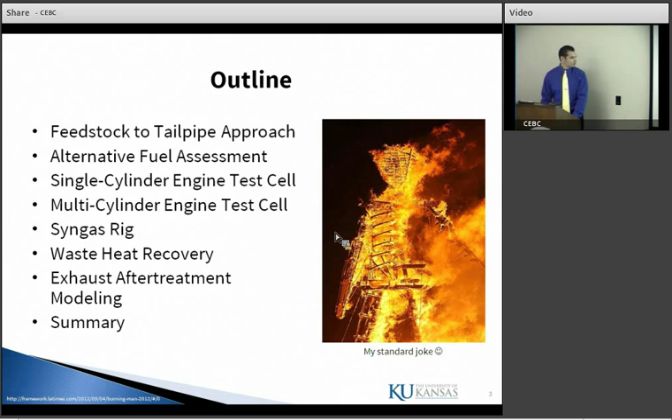The KU feedstock to tailpipe approach is really wholly unique to universities in that we look at the entire system of biofuels, from ecosystem level processes - dealing with ecology, evolutionary biology, and geography - to biomass production, again biology, environmental and chemical engineering. We look at how these fuels impact the land, how we produce these fuels through the production methodology, with some nice green algae growth, biomass pre-processing, and chemical transformation - how do we take these raw feedstocks and convert them to a biofuel?

Then alternative fuel assessment, which is my area, where we look at how these fuels perform in an engine, which is critically important. You can see the circular nature of this: you've got to grow the fuel, you need to see how the fuel impacts the land environment as you're growing it, then you need to convert it to a fuel, and then you need to burn the fuel. But when you burn the fuel, you have CO2 emissions, which end up impacting the ecosystem level process again. So it's really a wholly unique infrastructure in terms of analysis.

That's critically important because a lot of times when you do the analysis, you're looking at a specific portion and keep your blinders on with respect to what's downstream and upstream. When I was at the University of Michigan, if we got a biofuel in the engine laboratory, we didn't care where it came from. We just saw how it performed in the engine. Did it perform well or poorly? If it performed well, we said that was a great fuel. But what if it took a lot of land or energy to produce? What if it was hard from a catalytic standpoint, using a lot of catalytic material? Then maybe it's not the best fuel. So it's important that you understand the entire methodology.

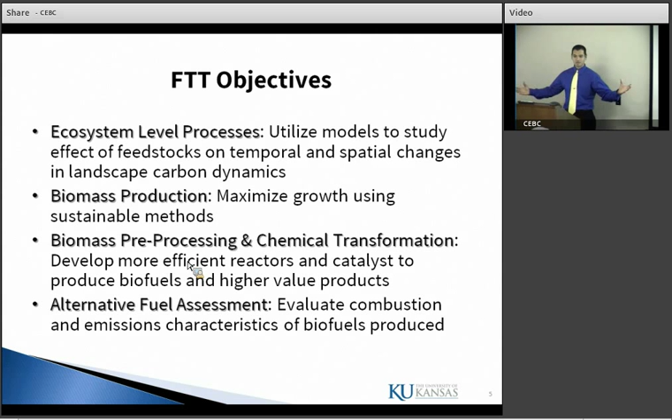If they don't work, then you hear a lot of bad things about them and people are reticent to use them. So if we look at the issues that biofuels have that we need to consider, well, obviously price is up there. Safety, how safe are they? I think someone said that if you were to develop gasoline today, the EPA and OSHA would never allow it because of how dangerous it is. Think how dangerous gasoline is. You pour a little on the ground, you can light it, bad things happen, right?

Reliability, it's got to work every time. Performance and emissions, how well does it perform in the engine?

Now you have to look at the life cycle production of these biofuels, the renewable fuel standard. The second one that came out looks at the whole picture involving these fuels. Energy content, material compatibility—not a lot of times is that thought of in engines. If it eats through your seals and your O-rings, then all of a sudden you've got issues. So engine companies have got to think about those compatibility issues.

And then also infrastructure. For example, I believe for jet fuel, they only allow 5 parts per million of biodiesel in the jet fuel lines, because the aircraft industry is really reticent to what biofuels will do in jet fuel. A good example of that: look at the fuel freezing quality. We've got jet aviation, we've got 100% biojet that might be upgraded through a Fischer-Tropsch process, and then biodiesel at minus 30 Celsius is basically solid. Do you really want that in your airplane?

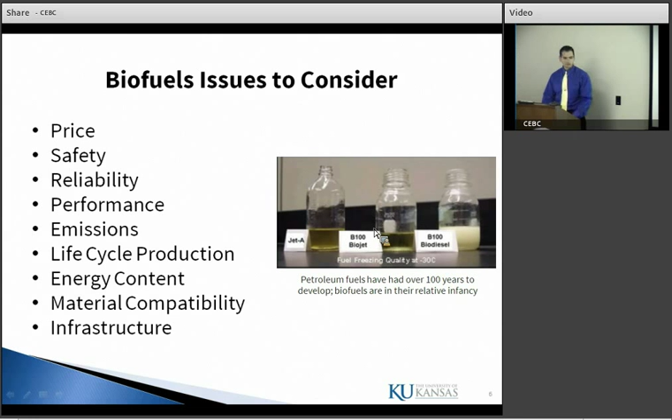So what I do, what my students do, when we look at developing the right biofuels, this does require engine testing. It cannot be done in a vacuum without engine testing. The physical fuel properties influence engine performance and emissions. Perfect example of that: here we have the same engine—here's jet fuel, JP8, here's ultra-low sulfur diesel, and here's biodiesel. We did not change injection timing at all between those fuels.

This is pressure as a function of crank angle, so it's telling us in-cylinder when each fuel is combusting. We didn't change anything, we just put the different fuels in. As you can see, that makes a huge difference with respect to these different fuels when combustion is occurring. That impacts fuel economy, nitrogen oxide emissions, particulate matter emissions, everything happening in the engine.

What does the customer want? The customer wants a fuel that drops in and works perfectly, right? It's not going to change their fuel economy, not going to change their emissions. They may not notice that, but the EPA will notice that.

But this is not what you see when you create a new fuel. They will always have different characteristics, because they're not petroleum ultra-low sulfur diesel. So the physical fuel properties do definitely influence engine performance and emissions.

So you have designer singular fuels or blends for the right characteristics. You've got to look at these fuels and say, can we blend them right? Can we take biodiesel and JP8 and make it a ULSD? You could do that. You can imagine if you just average those, it would be right in the middle. It doesn't exactly work that way, but that's part of the analysis that we try and do.

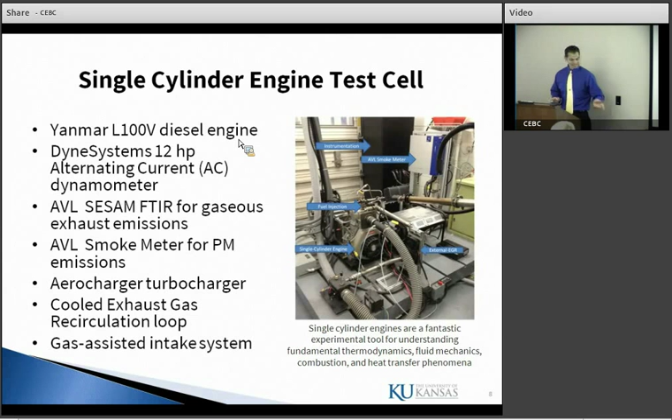This is great for fundamental studies, allowing you to design better fuel characteristics. Some of that information will translate over, but we do need a multi-cylinder engine test cell, and we do have one. You'll see that in a minute.

Another thing wholly unique to our engine is that it came with an older style injection system. That may not mean much to you, but it means a lot to me. We need it to reproduce as much as possible a production engine, so we tore off the injection system and added a high-pressure rail injection system, with a Bosch ECU and a fuel pump you'd find in the 2013 Jetta.

Same type of system. We actually have a Fiat Punto injector from Italy that happened to be just the right size to fit our engine. One of the most serendipitous, lucky things we've ever found.

But it allows us to dynamically control fuel injection to the point where we can inject up to 5 times per one thermodynamic cycle. So we can have 5 different injection events for one thermodynamic cycle. Think about how much time you have for one combustion cycle, and now imagine injecting 5 different amounts of fuel within it.

So we dynamically control fuel quantity and fuel rail pressure, 40 to 200 megapascals. This is where the industry is going - finer and finer atomization through higher fuel pressures. And we can do this to 0.02 crank angle resolution.

Why is that critically important? Let me go back to the previous slide. What do we want to do with these fuels? If we do testing and leave injection timing where it is, we're missing some of the fuel's properties and how they impact combustion, because it's not normalized - combustion isn't happening at the same time. So you have higher temperatures, different pressures, and you can't see exactly what's happening.

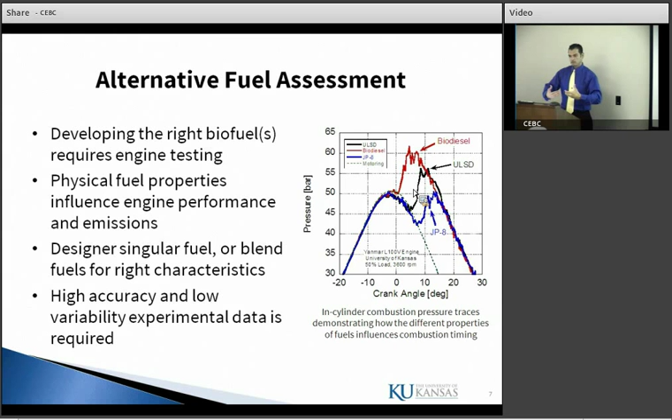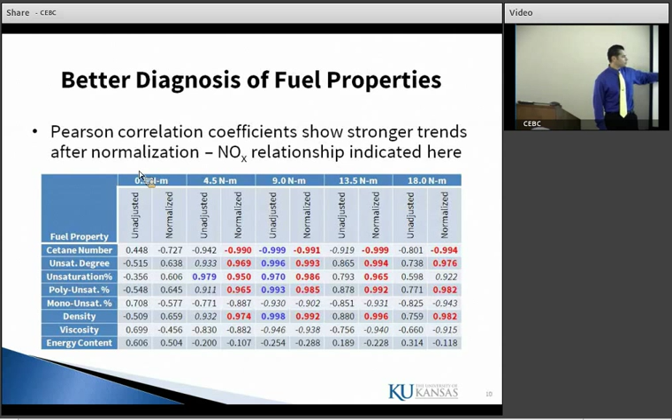Same thing with the degree of unsaturation, and the same with unsaturation percentage of polyunsaturation. By adjusting the injection timing so we normalize these fuels from a combustion standpoint, we get a really good understanding of how the properties are actually impacting things like NOx.

What does that mean to us? That means I can go to my colleagues in chemical engineering and say, you want a little bit more of this or a little less of this, because then we can start tailoring the fuels to have less NOx production, carbon monoxide, better fuel economy. You name it, we can design a fuel that works better.

How would that happen without an engine test cell, and without the proper characterization and normalization? You wouldn't be able to have that.

You would just guess and say, this looks good, maybe it's easy to produce, maybe it's cheap, great. But if it doesn't perform well, then that doesn't work well in the overall industry. So that's an upgrade that is critical.

You can see in some of these where we didn't have a strong correlation before, we had a weak correlation, now it becomes strong. Now we can say for certainty, this is what happens.

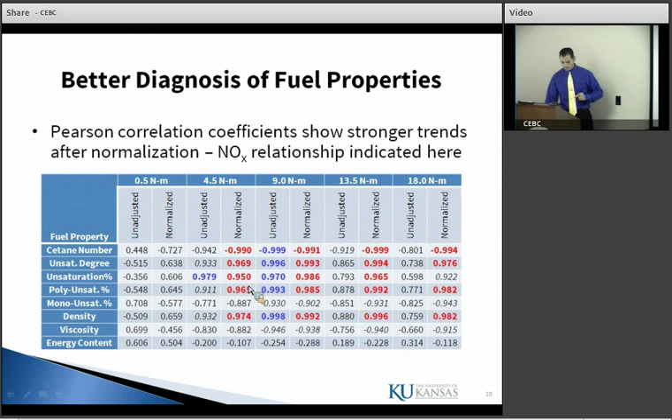This is an example illustration. This is the paper that we created for Energy and Fuels before we upgraded the injection system.

Now we're doing a follow-up paper where we can look at these characteristics such as the hydrogen-carbon molar ratio and how that impacts things like NO, NO2, total hydrocarbons, particulate matter, brake-specific fuel consumption, which is fuel consumption.

We can create a table so that we can go back and say, maybe you need a little bit less viscosity, maybe you need a little more viscosity, depending on what you want to do. For some of these relationships that we weren't able to determine before, we can start figuring out those relationships so that we can develop these better fuels.

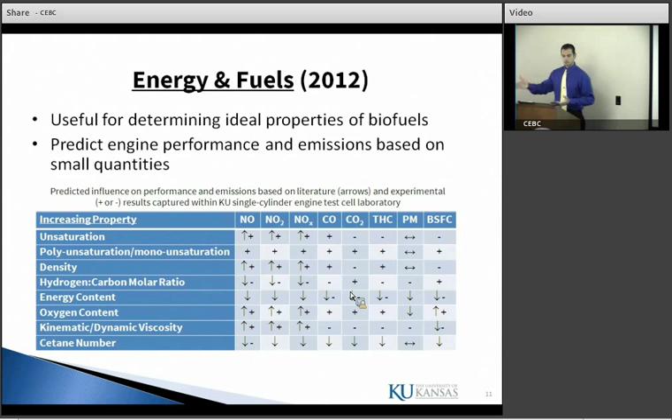That's what the single-cylinder engine is great for. Really fundamental - what is happening, how is that a function of the fuel properties?

This also allows us to test things beyond biodiesel. You've got an interesting fuel, you've got an interesting concept, you want to do it maybe for the military. The military is jumping beyond your first generation biodiesel, diesel, to the next generation diesel.

The reason they want to do that is because they want something that's just drop-in, that works perfectly. They don't have to worry about the fuel gelling, they don't have to worry about any degradation in storage.

Another thing is the military likes the single fuel forward policy, which means that they want to simplify the logistics in moving fuels. You've got gasoline vehicles, you've got diesel vehicles, and you've got jet airplanes. You've got to transport 3 fuels, right?

Imagine each fuel costing $500 a gallon. It's not like they're growing it in Afghanistan - they've got to transport it in themselves. So they've moved to a single fuel forward policy, which is pretty much JP8.

They also want to drop in fuel. They want to go straight to green diesel. So what this allows us to do with our engine test cell is actually test green diesel.

Here you see ULSD with the JP8, the conventional petroleum JP8, and we were able to get Syntroleum R8, renewable jet fuel 8, and we were able to show its different characteristics.

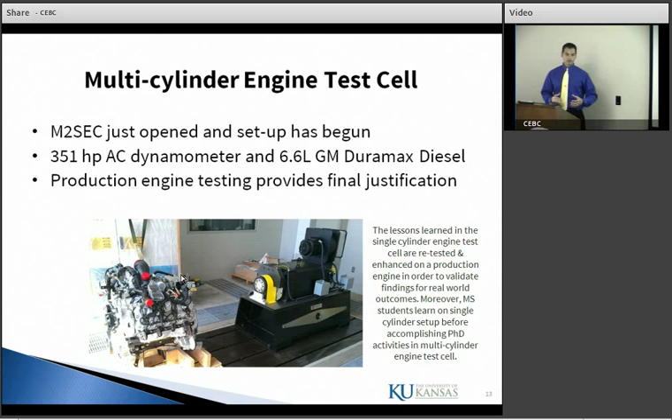So you have to think about training students along the same time. This isn't a small reactor. This is something burning under a lot of pressure, with a lot of heat, and a lot of power. They've got to be trained well. So I have 2 PhD students right now that are working on getting this going.

Finding funding for it is always a challenge. It's the chicken and the egg, right? You need to have the engine to get funding, but you need the funding to build up the engine test cell. So we're working on that.

So that is where we're going with engine testing. Our single-cylinder engine is going to just keep chugging along for forever. We're happy to throw any fuels in there that you want. We've put in jet fuels, we've put in something else—you name it, we've probably put it in there. If you want to try some ethanol-assisted diesel, biodiesel, jet fuel, great, we're all game for that. We love burning things in our single-cylinder.

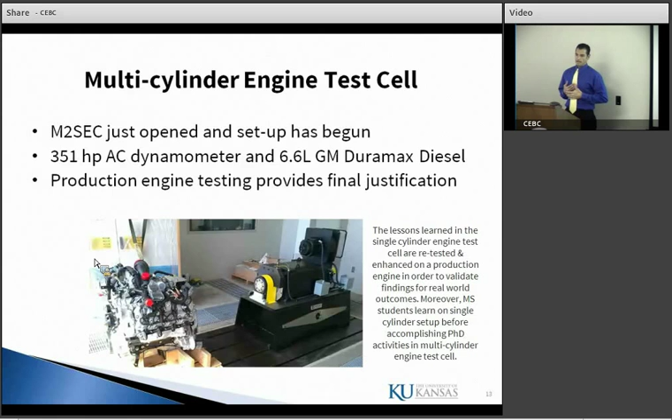But another thing that's critically important when you look at biofuels is the byproducts. There's a lot you can do with the different byproducts, but because of my background, I like to burn things. So when I look at the byproduct for things like biodiesel, I look at glycerin. One gallon of biodiesel creates about 1 pound of glycerin. If you look at the economics of biodiesel production, it's really tied to glycerin. At times, you've seen glycerin as low as about 5 cents per pound. If you take into account the density and the energy basis, this is about $1.11 per gallon for glycerin.

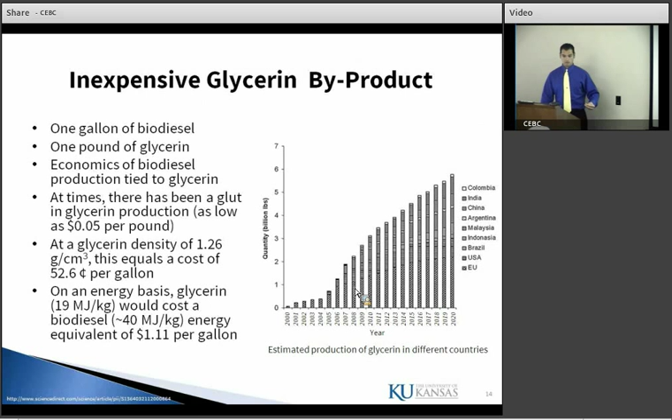Glycerin's great. Glycerin's got a lot of hydrogen. It's a great hydrogen carrier, right? What could you do with that hydrogen? There's a lot of higher value products that you can get. Pure glycerin is great from a selling standpoint, food standpoint, but if I've got a hydrogen-rich fuel, and if we look at the amount of this hydrogen-rich fuel, and it's going to keep increasing as a renewable fuel standard sees more diesel on the market, I want to do something with that from an energy standpoint, especially when I start looking at $1.11 per gallon.

So what could you do, could you use it directly as a fuel? Well, it's subject to caking or settling and solidifying the fuel lines. So no. Could you use it as a fuel additive? People have done that if you look at the SAE literature. The atomization difficulties due to high viscosity result in poor emissions and low combustion efficiencies. So no, it does not work well as a fuel additive.

What could you do? You can convert it to a synthetic gas, syngas. You can look at the glycerin, you can do some partial oxidation, you can do some water gas shift reacting on it, steam reforming. You can pull off that hydrogen, you can pull off the carbon monoxide. If you can do it right, you get a lot of hydrogen and some carbon monoxide.

As an engine tester, do I care about carbon monoxide? No, it's a fuel. It's got an energy content, 10 megajoules per kilogram. You give me an engine, I can run it on carbon monoxide. It's a fuel, it can be used. And I did that, actually—I should say we did that.

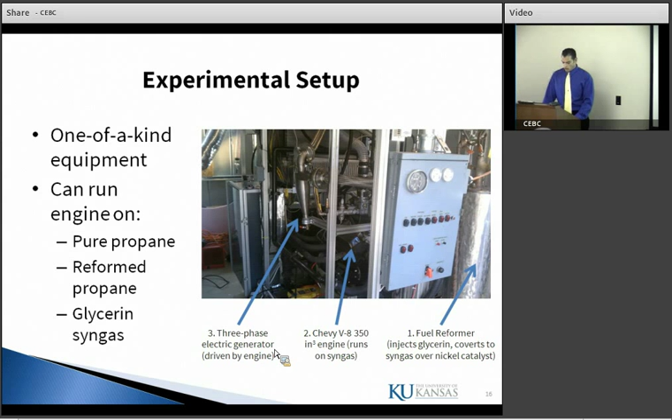Then we can take this propane, send in compressed air into our reformer. The reformer will heat up as we're basically doing rich combustion in the reformer. Our syngas comes out, it's cooled down, sent to the engine, and we can run the engine.

Once the reformer is nice and hot, then we basically put our glycerin in. We use a 20% water, 80% glycerin mixture in order to promote the water-gas shift reaction, to get more hydrogen coming out of it. It goes into our heat exchanger, which cools our syngas.

Power. All instrumented. We have in-cylinder pressure transducers. We can actually measure the entire process.

Chris, when you do this it's really very intriguing. When you do the overall energy balance, is the heat required for the reformer self-sufficient? Yes, we actually had to take out some catalytic material because it was highly exothermic. When we start putting the glycerin water mixture in and get it nice and hot, it maintains itself extremely well, to the point that we have to really watch it because otherwise it'll take off.

And so we've used glycerin conversion over nickel. We tried to do the literature research and had help from Susan Williams in this area: 7.2 weight percent over an alumina oxide support. We just bought alumina oxide beads. My graduate student in mechanical engineering actually did the weight percentage coating himself with an oven.

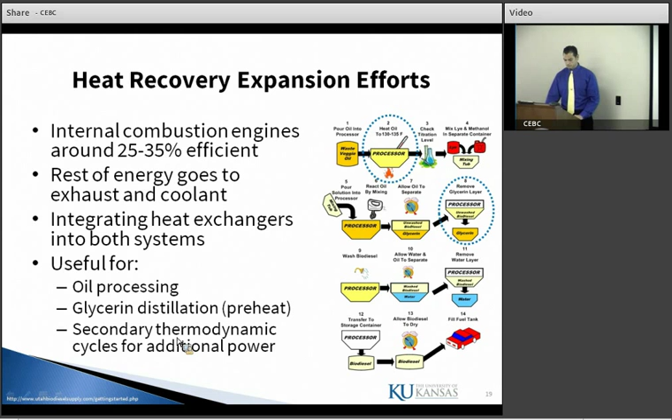This one I like: secondary thermodynamic cycles for additional power. You've got heat, you've got energy, let's convert it to electrical energy. I have a student working in this area doing his PhD looking at waste heat recovery. If you take organic Rankine cycles for exhaust energy recovery, it demonstrates potential for 10% improvement in fuel economy. 10%.

You know what the industry is trying to do each day? Get a fraction of a percent better in fuel economy. 10% - it's been used in the past. In the 70s, when we had the oil crisis, they started looking into these secondary thermodynamic cycles. It will be used in the future. The cost benefit is attractive.

You can pay for the system in a couple of years on board a vehicle. If you don't believe me, my student wrote a review paper on the subject, and I'd be happy to send it to you. It's actually the #1 most downloaded mechanical engineering article in 2013 from Elsevier - that shows you this is really where the industry is going.

We're implementing this in a single-cylinder laboratory as a precursor to multi-cylinder efforts, and we have a novel idea here. The novel idea is, for direct injection engines, they produce a lot of particulate matter.

Particulate matter is captured in a filter in the exhaust in your new diesel engines today - a diesel particulate filter. You've got to regenerate that after a while, because you know your vacuum cleaner, right? It's basically a particulate filter. What do you have to do every once in a while with your vacuum cleaner? Empty it, right? Clean it out. Unless you have a Dyson, but we don't have Dysons in our exhaust.

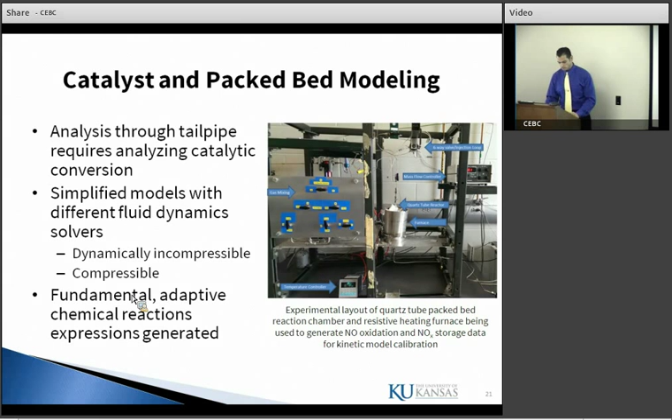The idea is to look at, through the tailpipe, how these conversions change as a function of different NOx emission levels coming out. I have a compressible 1+1D model of flow through a diesel particulate filter. We're basically creating a new model to incorporate waste heat recovery along with that, so we can see how the flow in the chambers and the heat transfer to the working fluid can be modeled, so we can do more predictive studies that tell us what tests to do in the future.

We're looking long-term to go to engine control unit type of systems. Imagine if you got a more efficient catalyst and a more efficient combined diesel particulate filter heat exchanger, and an engine control unit with simplified models in there that can help control engine operation to get better fuel economy and lower emissions. This is the area we're working into.

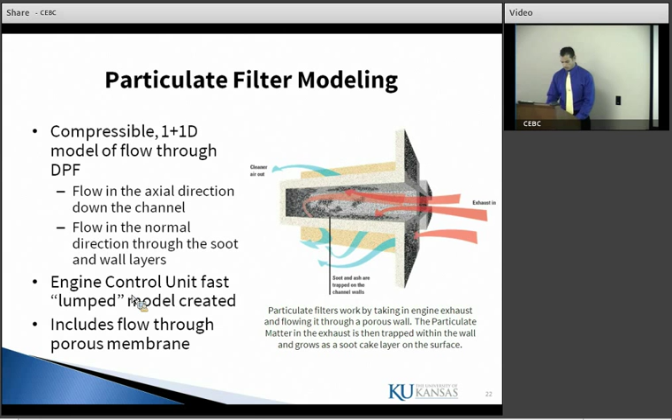Including flow-through porous membranes, you name it, we have a lot of capabilities in that area. So basically, the end of the story is, you give me a fuel, and we've built the methodology to test all the way up through what's coming out of the tailpipe. Not only from a combustion standpoint, but from a co-product standpoint, a waste heat recovery standpoint, a catalytic converter standpoint, and a diesel particulate filter standpoint. We have all that capability here at the University of Kansas.

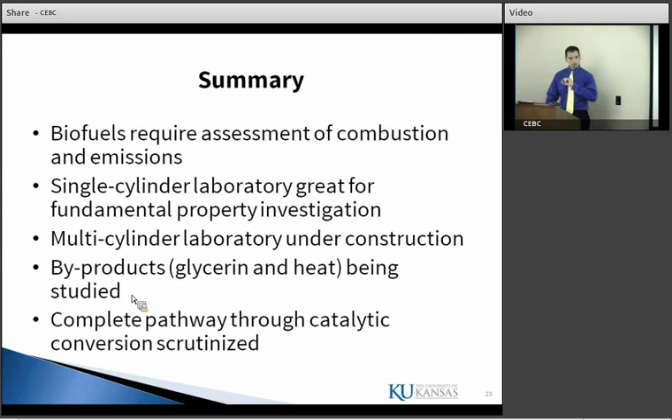So biofuels really require the assessment of combustion emissions. We have a single-cylinder laboratory, which is great for fundamental property investigation. The multi-cylinder engine laboratory is under construction. The byproducts are glycerin and heat. Heat is often neglected as a byproduct, and we need to include that as being studied. And we have a complete pathway through the catalytic conversion, we're analyzing every aspect of that.

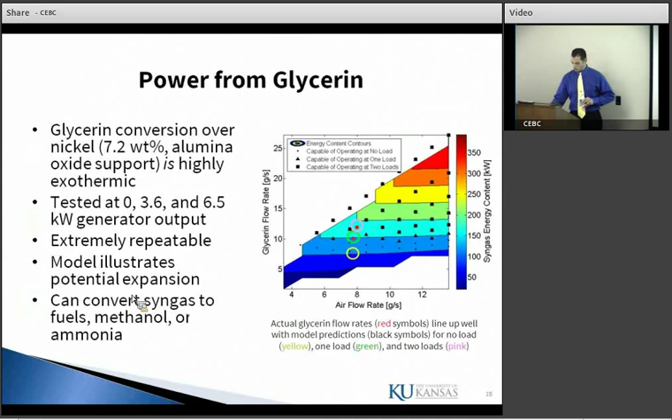I really like the idea of utilizing glycerol as an energy source. If I think about the chart you showed with all the different components, even though well thought out, they would take up a lot of space. So I wonder if motor vehicles have enough room for all of this. In terms of a motor vehicle standpoint, no, there would not be enough room to integrate a glycerin air system and reformer and go directly to your engine.

They actually tried that a number of years back when I was at Michigan, working with Levi Thompson on a small-scale hydrocarbon-to-hydrogen fuel reformer. It's very difficult to control, and to get it to that miniature scale just does not work well. So this is definitely not suited for onboard a vehicle.

However, if you're at a biodiesel or biofuels production facility, instead of drawing from the grid, and you've got a lot of glycerin hanging around, you could integrate it there to create power. And you might say, well, electricity is cheaper, why won't you just use electricity to create the power?

I agree with you, but being at the biofuels conference, they talked a lot about renewable fuel credits, and that's what the industry is moving towards. They really want a lot of renewable fuel credits. So if they can make their process more exciting from a renewable fuel credit standpoint by using the byproduct, and the EPA likes that, it helps them sell their fuels cheaper. They can sell those renewable fuel credits to other producers who need them. So onboard a vehicle, theoretically yes, practically no. But in a steady state system, we have all this in a small shed, and it works.

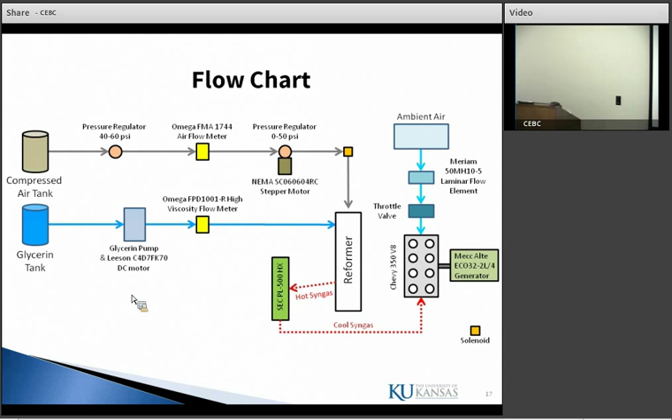The other thing is, with all the nice infrastructure you're putting together, when we talk about fuel certification for transportation, they've got a rigid set of standards or protocols they have to go through - I guess ASTM has a methodology. So would these be close to ASTM certification, or how do you characterize that? Because ultimately it has to go through those expensive protocols, right?

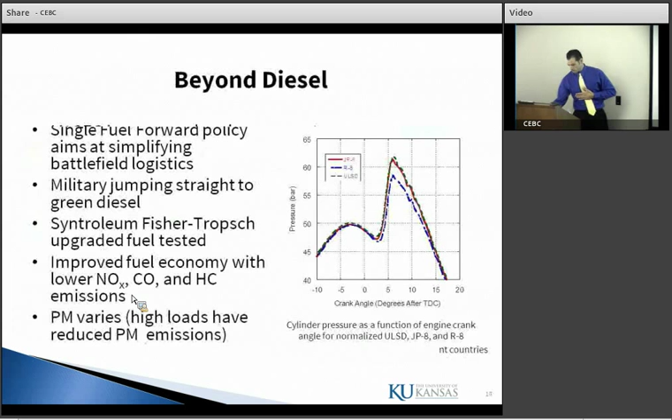Exactly, these fuels definitely have to go through these expensive protocols. For example, palm, jatropha, soybean, and beef tallow biodiesel were created in Susan Williams' laboratory, and then she runs a full ASTM test on it. So we make sure all these fuels when we test are within the specifications ASTM wants for biodiesel. These are all certified fuels, 100% certified, and then we test those. It's a great question - we just can't test fuels willy-nilly, we have to make sure they conform to the standards.

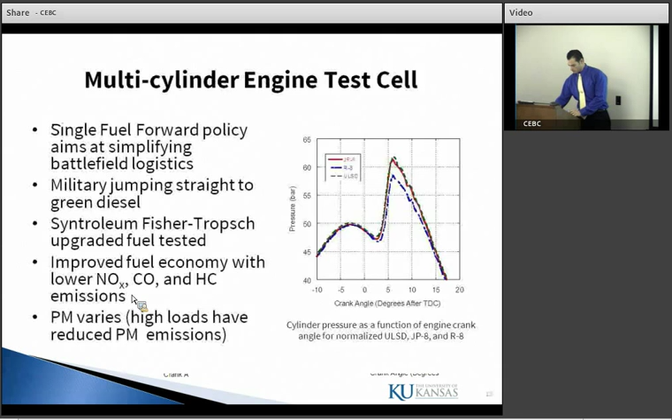Just a curiosity question - you touched briefly on the hydrogen carbon monoxide assisted biodiesel and biodiesel. Have you ever tried just hydrogen assisted? What's your opinion on that? Is that something that works well for reducing fuel economy, just hydrogen by itself?

I love hydrogen. Hydrogen is the perfect fuel for internal combustion engines. This paper, what we actually did, was a master's work by one of my students. He went through and reviewed the hydrogen-assisted literature and we documented all of that information - it's almost a review paper in itself. Hydrogen has got a laminar flame speed. If you look at gasoline, the laminar flame speed is around 40 or something like that. The laminar flame speed for hydrogen is 191. It's an extremely fast-burning fuel.

What this allows us to do, and we found through this experiment, is that when we add hydrogen, our thermal efficiency goes up, so we get better fuel economy. I love hydrogen, I would burn it all day long. The problem is we don't have a hydrogen infrastructure. But if you had a fuel reformer, and let's say you had a glycerin tank and you were able to reform and put it into a tank of hydrogen on board your vehicle, we could use that very much to augment fuel production. I love hydrogen.

Can I ask your opinion real quick? I know a guy who had a big diesel truck, and he put an electrolyzer on his truck. He essentially put a big water tank in, put an electrolyzer in, and then ran that off and used the electricity to run off the generator and then put the hydrogen fuel in. He was claiming like 20 to 30% better fuel economy doing that. I was a little skeptical - I'm just curious to see if you think that's feasible, unfeasible, or?

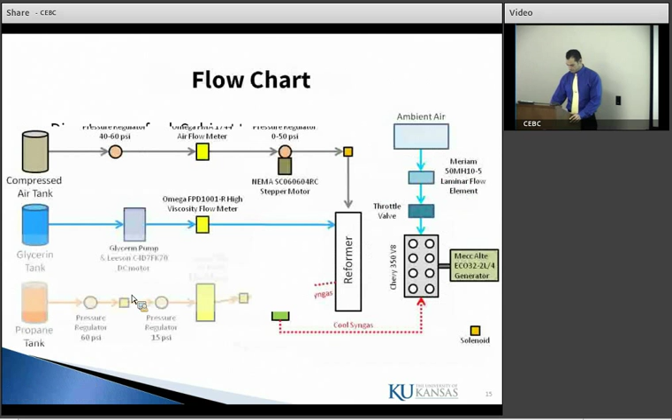So you mentioned the heat exchangers, adding those to a car to improve the efficiency, and you said that had been done in the 70s. Could you elaborate on what was done and why they took it out? Is it just too expensive, or the car too heavy, or would they prefer lower efficiency? The question is basically, why did they do it in the past and then not go through with it?

Fuel cost - when they were implementing it, the fuel prices were spiking, and it made a lot of sense. If you looked at the cost return on it, it was a couple years, 2-3 years. You do have to consider packaging constraints, so you do have to play that role. But when fuel prices dropped in the 80s, the economics did not make sense, and with the additional packaging on top of that and the additional weight, the industry moved away from it.

But now what's happening, our fuel prices are much higher, so the economics is more beneficial, and we have better technology on the heat exchanger side. So not only did our payback go from this long, but taking into account fuel costs now, and better technology now, in 5-10 years you will see cars with this on, without a doubt. In 10 years you can come back and tell me I'm wrong, but we will see that because it makes practical sense, and that's why I wanted a student to work in this area.

No one has thought of this though - this is our own. We have a paper that we're submitting to SAE that we're really hopeful about, see what it says. Could be a great idea, could be a horrible idea, but it's an idea, right? That's what we're trying to do as researchers.

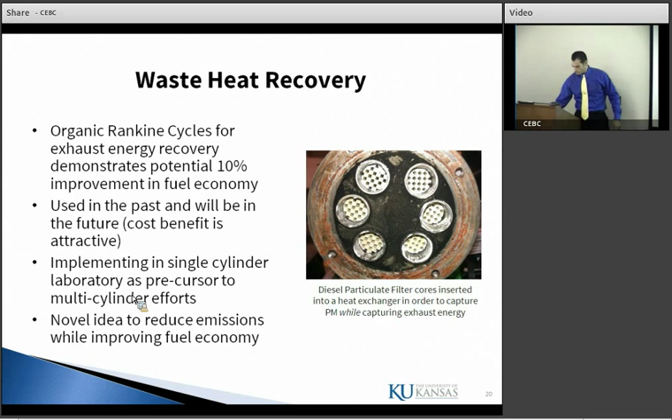Question for the fuel injection: what kind of nozzle do you use? What time, I'm sorry, for the fuel injection, what type do we use? Spray nozzle. How do you do it? Spray model, spray nozzle, oh spray nozzle. For the fuel injection in here or for the reformer?

For your test, do you use the same spray nozzle to test the different fuel? Yeah. And maybe I think the different fuels need a different nozzle to test performance.

That brings up an interesting question: when we change fuel, should we be changing the engine hardware at the same time? Ideally, yes. Ideally, your engine is tailored to that specific fuel.

The problem is, from a manufacturing standpoint, how can they manufacture if you don't know what your fuel is going to be? Right now, when I fill up on diesel, I drive a diesel car and practice what I preach. I'm probably filling up with 2% biodiesel, maybe 5% biodiesel. The properties will be different. Engine manufacturers don't know that, so they have to design a fuel injector for basically petroleum diesel.

So I agree with you. Ideally, if we could develop a better biofuel, we could develop the engine to handle that better biofuel, and we get even better results. Yes, that would be wonderful. I'd be happy to do that.

Thank you for the presentation, very interesting, just have a question. Right now, everybody knows that ethanol works, we put it every day in our cars. So I'll explain: have you looked at any other oxygenate, particularly butanol? The chemical industry is trying to sell butanol as a new trade, the new ethanol, because it's got more energy, similar to gasoline, but to what extent is that doable for an engine?

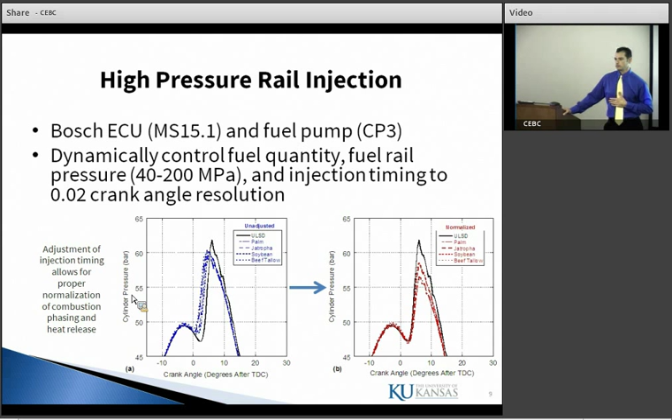You do it with gasoline, not with diesel? We can't run it in our engine with gasoline, unfortunately. The engine is just not tailored to that type of fuel. The reason we chose diesel is, one, I drive a diesel, but that's not the reason.

The majority of trucks on the road, your commercial economics, are tied to the trucking industry. All the big trucks use diesel engines, so your major fuel user is petroleum diesel. That's why we chose diesel, because we felt like if we had to build one test cell, where could we go? It's also unbelievably difficult; we couldn't find any single-cylinder ethanol or gasoline type engines. So we're limited to that area.

But there are plenty of SAE papers where they're looking at ethanol and diesel, butanol and diesel. So it is a possibility.